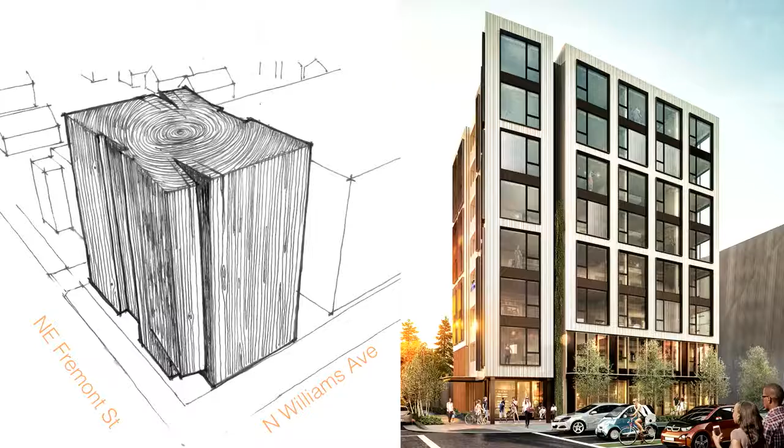Directly across the river from here is now the tallest CLT timber building in the United States, which we're wrapping up right now. We're going to be done in about August. And this building uses timber framing up to 95 feet. And why that's extremely relevant to this discussion is that up until this building was permitted, that core, the structural system in there, would have had to have been post-tension concrete. That was the only allowable material by code.

Regardless of the fact, as I mentioned, there's been a lot of advancements around the engineering. But that was the only allowable material by code until this building came along. And what's really cool about this is that this frame, the structural frame, is actually a renewable resource now. And that's really the important part of this. The frame, the structural frame of a building 95 feet into the air, is a renewable resource.

The inspiration for Carbon12 was a nurse log. Nurse logs, as many of you probably know, are trees. When they fall in the forest, some people believe they've only lived about half their life. Kind of interesting to think about. The second half being dedicated to offering nutrients to the next generation of life.

These are fascinating features in a forest, and you can see both new saplings and great big trees burrowing their roots deep into the cores of these fallen trees and pulling what I like to think is not only sustenance, but actually knowledge as well. And so that was the inspiration for Carbon12.

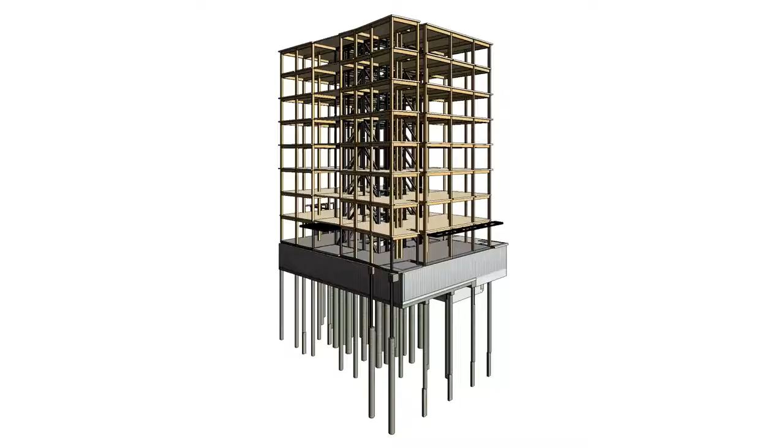Let's take a minute and talk about, as David mentioned, what CLT, cross-laminated timber, is and what engineered timber means. But first, let me take one second and talk about, as an architect, what's really exciting about this point in time for us is that our 3D modeling programs that we use in architecture are now communicating almost directly with CNC machines on the factory floor. CNC meaning computer-generated cutting machines.

So we're almost at a point where you can click a button and order a building manufactured at a plant. Another way to think about that is these are almost 3D printed buildings now. But instead of plastics or metal, these are made out of wood fiber, out of a renewable resource. So how did this engineering that I mentioned, how did these advancements occur?

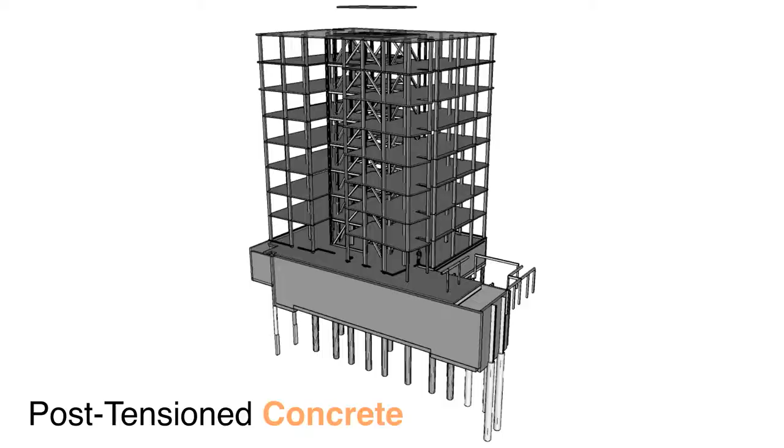Well, it's interesting. This next slide talks about post-tension concrete, which, when you came off the bus, the majority of buildings are built with. Post-tension concrete means two opposing layers of steel tendons, encased in concrete and within formwork, and then you repeat that for the columns, and then you go all the way up a building's structure. And those are the majority of the buildings we've all seen built here in Portland and Seattle these last 30 to 40 years. This technology has been used.

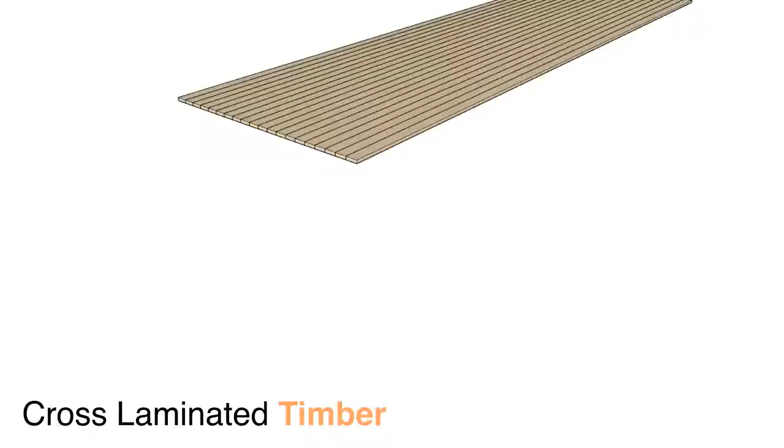What's super exciting is that CLT, cross-laminated timber, is very, very similar, but using, as I say, a renewable resource. Cross-laminated timber does the same thing. Cross-laminated under high pressure, glued together, 2x6 or 2x8 material, cut precisely to fit within 1/16 of an inch, lowered into the building, panel by panel. That panel there was about 32 feet long, 10 feet wide.

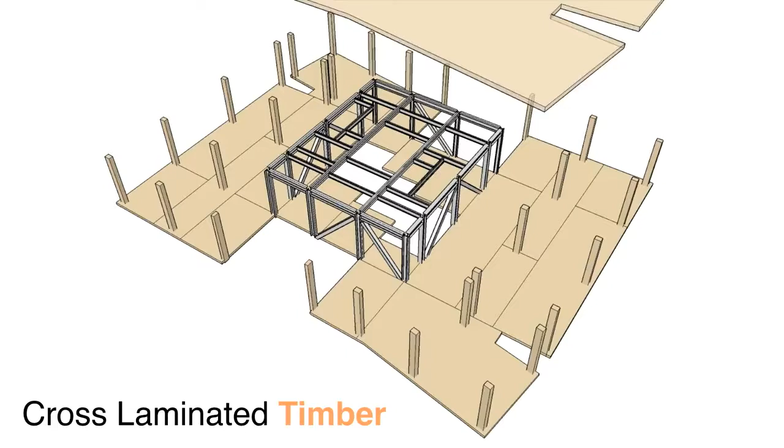The columns are done exactly the same. Piece after piece of 2x material, glued together, high pressure, cut to fit, lowered into the building, and then repeated all the way up. And so what was fun for me as an architect and for our construction firm is to be involved in that for the first time here.

These panels are coming in right off the truck. 12 trucks came and delivered this entire 95-foot tall building. Panel after panel lifted right off the truck. And again, as I mentioned, within 1/16 inch of tolerance.

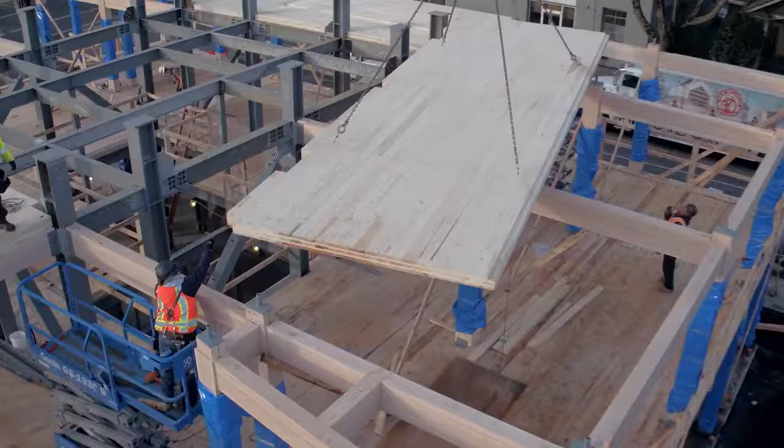What's super cool is that we had, for the first time, I believe, ever in the world, the factory pre-finish these panels. So imagine that. So that when that panel drops into place, it's not only a renewable structural form, the underside was also a finished ceiling of the units below. And that's a huge difference.

But what's curious is, up to 14 inches thick, that CLT panel has the exact same performance characteristics as post-tension concrete. But one's renewable, and one's a carbon sink, and one generates carbon.

So colleagues of mine, Andrew Waugh in the UK and Michael Green in Canada, have been doing terrific work for about 10 years. And they've been doing that work for a few reasons, and they're a bit ahead of us, but we're catching up.

They're doing that because these products sequester carbon. So in photosynthesis, just the act of photosynthesis, carbon goes into the tree as it's growing. Young trees actually consume more carbon than older trees, which is pretty interesting, kind of like teenagers. And the carbon goes into those trees and is captured there. So when we use those products in buildings such as these, the carbon sits in the building.

Second, very important here in the Northwest, especially based on that Northwest Forest Plan history, these products use trees usually 10 inches in diameter and less. This means that old growth forests are completely off limits for these products. The machinery can't even handle very large diameter trees as they once did, so these trees are usually third, fourth, and fifth generation sustainably harvested forests, which is pretty exciting.

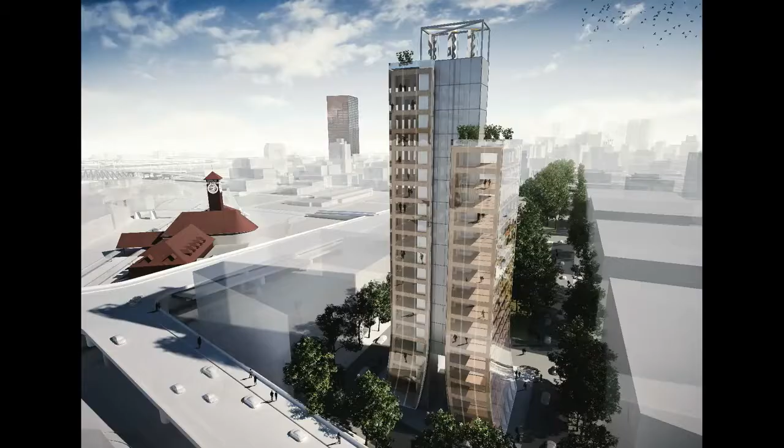And I'd like to talk to you. This is the first time anybody has seen this building. We've got this proposed for the city of Portland. They don't know about it yet, but it's 250 feet tall. It'll be the tallest in the world. Engineered timber. We've situated it down by the post office again. No one at the city of Portland knows about it, but maybe we can pull it off.

And what's interesting about this, what I'll pledge, much similar to the way the forest industry has been doing their work for the last 40 years, is the forest industry, as you probably all know, plants 2 to 3 trees for every tree they cut down, and they've been doing that for a long time. They haven't told their story very well this last 20 years, but they've been doing very good, sustainable work. I'll make the same pledge with Carbon-12. I'll pledge to plant the trees equal to those necessary to build this building prior to breaking ground. And in this way, what would be pretty exciting is this building would again be the nurse log for this next generation of seedlings.

So where does that leave us? We are in a position now, as our cities densify, people are moving into urban centers around the world, and people are pouring into Portland, and there's a lot of choices of how to build. And I think we've recently learned that regarding climate change, the federal government has kind of left us on our own now, which is unfortunate. So we all have to be making decisions. So as these people pour into Portland, what are we going to choose to build with? What are we going to choose to build those schools and libraries and state houses and capitol buildings?